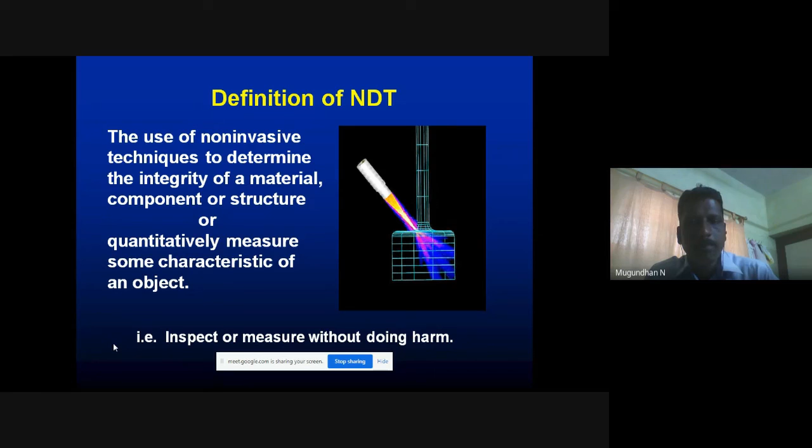Can anybody tell me what you're going to do in visual testing? Anyone? Yes, anybody else? Yes, visual, what are you going to do in visual?

In visual testing, sir, we can find out pinhole, undercut, reinforcement, and thickness of the weld, and see if any buckling is there in the plate or not. That's all.

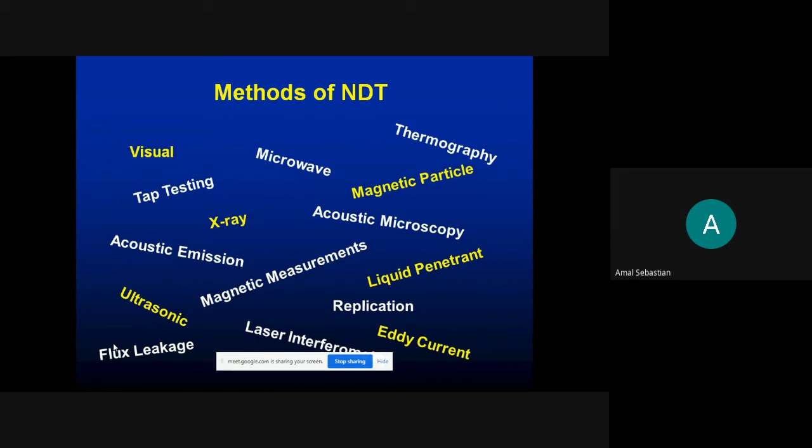Hello? Can anybody tell me where you can use this liquid penetrant testing? Liquid penetrant can be used only to identify the surface defects, which is present on the surface only, you can identify by this method.

When we come to the second one, magnetic particle testing, can anybody tell about this one? Yes, anybody else? Magnetic particle testing. Sir, it is used for detecting surface and shallow subsurface discontinuities, similar to the liquid penetrant testing.

We are using the magnetic particle testing. As the name indicates, magnetic particle, this can be applied only in ferromagnetic material. By using the magnetic force of attraction, we are using this particular method.

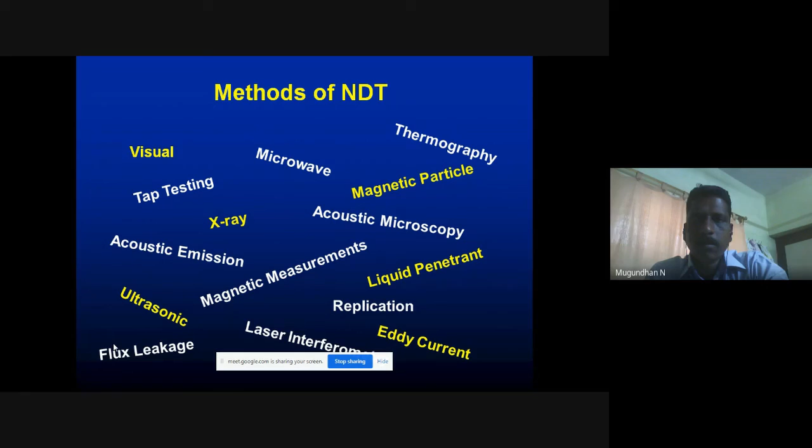I'm explaining the basic principles of each method. Is there any doubt? Can anybody tell me? Shall I move on to the next one? In this case, you can see what are some uses of NDE methods.

For what purpose are we using these NDE methods? NDE is nothing but non-destructive examination. First, flaw detection and evaluation - to identify defects and assess the size of that defect. Leak detection applies when we are doing pressure testing. Location refers to where a particular defect lies inside the weldment. Dimensional measurements mean the size.

Structure and microstructure characterization - can anybody tell me what this means? Structure and microstructure means you can see through the microscope the crystalline structure and the metallurgical characteristics.

Estimation of mechanical and physical properties - this is what I discussed in my previous session. We study mechanical and physical properties like tensile strength, ultimate strength, breaking strength, and toughness. These are all included in the estimation of mechanical and physical properties.

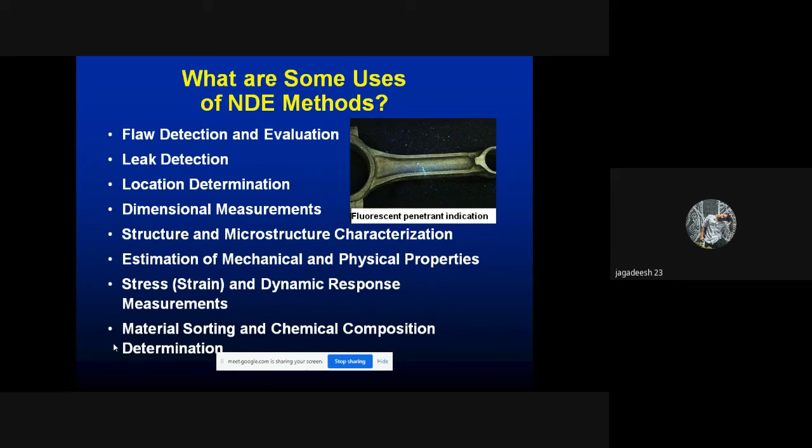Always father and son have some tug of war. If you are not doing something, or if your father is instructing you to do something and you are not doing it, what is his immediate reaction? He will get angry. Immediately he will call and scold us, right? Am I right or wrong? He will give a lecture as he likes.

Because of that, some sort of stress and strain happens to us, and the similar thing happens to the material also. Even when we ride a bike as youngsters, when we ride at higher speed, the mechanical components get some strain due to continuous stress. If you see that connecting rod, can you see that small crack in it? That happens due to excessive load and the corresponding strain occurs on that connecting rod.

Material sorting and chemical composition means we are classifying the material, say for example IS 2062. This is actually a mild steel material with 3 grades - grade A, B, C. Grade A can be utilized for heavy structural components fabrication. Grade B can be exclusively used for manufacturing pressure vessels. This material is categorized according to chemical composition - grade A can withstand high compressive strength, whereas the tensile strength is much higher in grade B material.

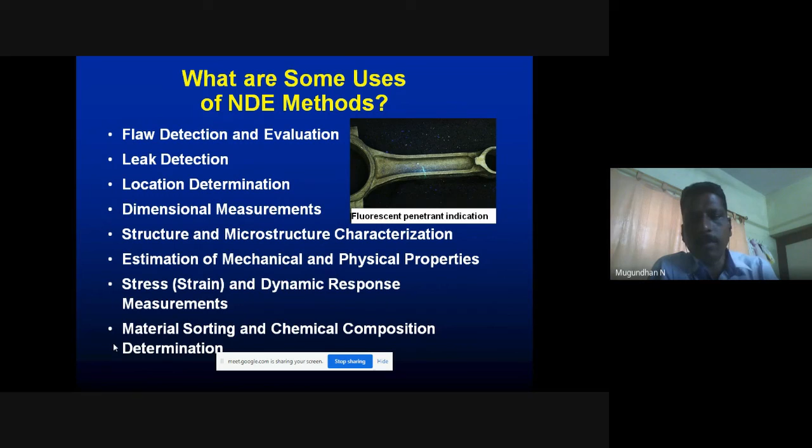You can use these NDE methods to assist in product development. What do you mean by assisting in product development? Can anyone tell me?

To give a precise product as per the customer's need, when a company is going to launch a new product, they will try to do all kinds of research and design in the design department. They will use the trial and error method, manufacturing one component and subjecting it to different types of tests, and finally they will conclude which is the material needed for the actual product. That is called assisting in product development.

To screen or sort incoming material means the material which is coming to the factory from the material stockyard, so that material can be classified. Also, to monitor, improve, or control the manufacturing process.

Can anyone else tell me about this factor? Yes. Anyone else? To monitor, improve.

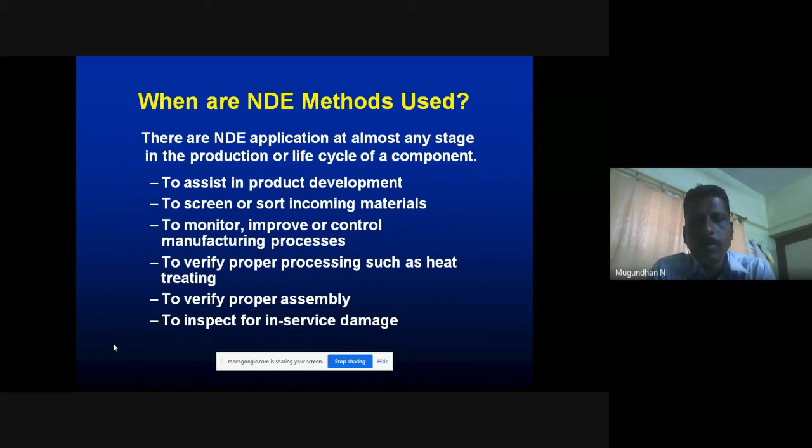In-service damage means once a product is sent to the customers and it will be in operation for some stipulated time. For example, after one year, we may be doing that AMC. In that case, the concerned quality team will be assessing that product, how far it works, and what is the performance of that particular product. Is there any discrepancies that has to be sorted out? Those things will be done under inspect for in-service damage.

This I have already told you: visual, liquid penetrant, magnetic, ultrasonic, eddy current, and X-ray.

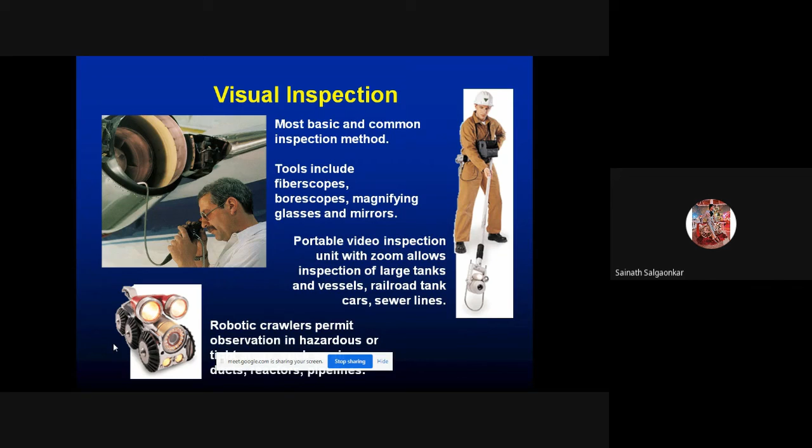Sir, helmet, safety shoes. Mirror, torch - you said safety shoes, right? Yes sir. And boiler helmet, that will be monitored by the safety personnel, they will be doing that visual inspection from the safety side. But as a quality inspector, what you said is correct - mirror, torch, magnifying glass, then even steel rule also, measuring tape, right? These are all basic equipments that should be used, right?

You can see that fiberscope, borescope, it depends on the inspection to be done on the precision equipments. And can you see that some trolley like that? Do you know where that will be used? Exclusively where the concerned inspector cannot do the visual inspection directly, or when the necessity arises, they have to do the inspection on remote parts. In that case they will be using robotic crawlers. For example, when we are working in a nuclear power plant, you cannot directly go and do that inspection, so you need some sort of remote visual inspection devices. These are all the devices used in that particular sector.

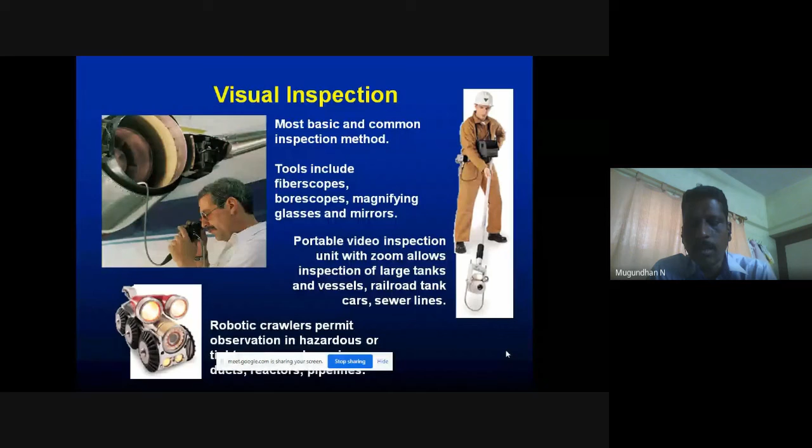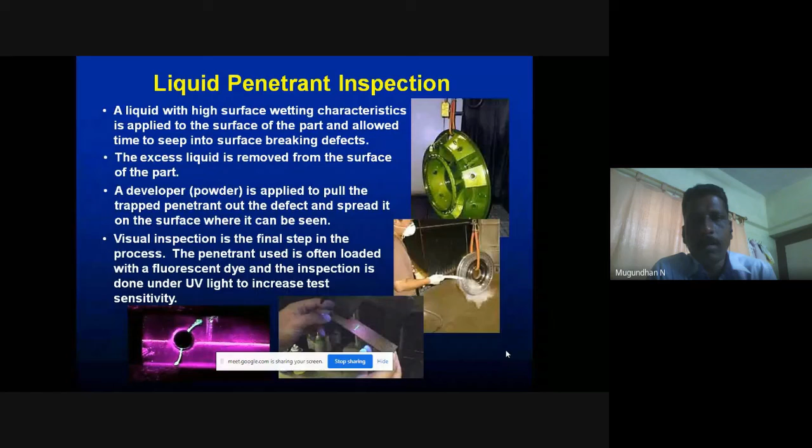After that, the excess liquid is removed and the developer is applied. After applying the developer, we have to give some time for the penetrant to come out. That time is called the development time.

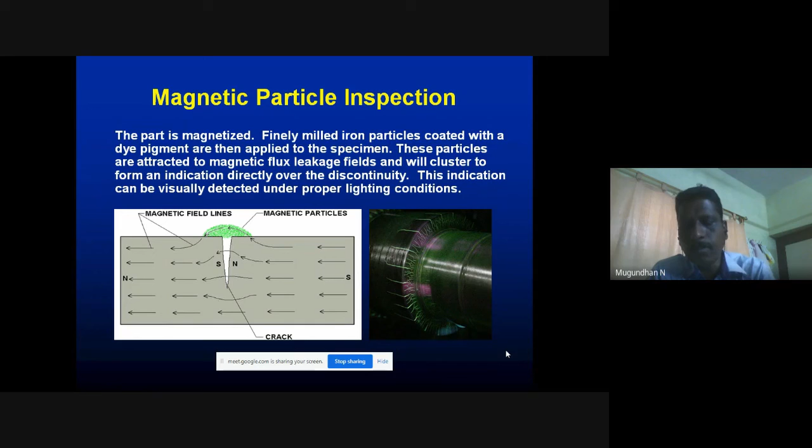In magnetic particle testing, we are using two methods: one is the visible method and another is the fluorescent method. The fluorescent method is mainly used for identifying defects which cannot be seen visually, exclusively for critical components. You might have seen aircraft blades - those are all precision components. So if we want to identify any crack on turbine blades, we can use the magnetic particle fluorescent method so that we can easily identify the defects.

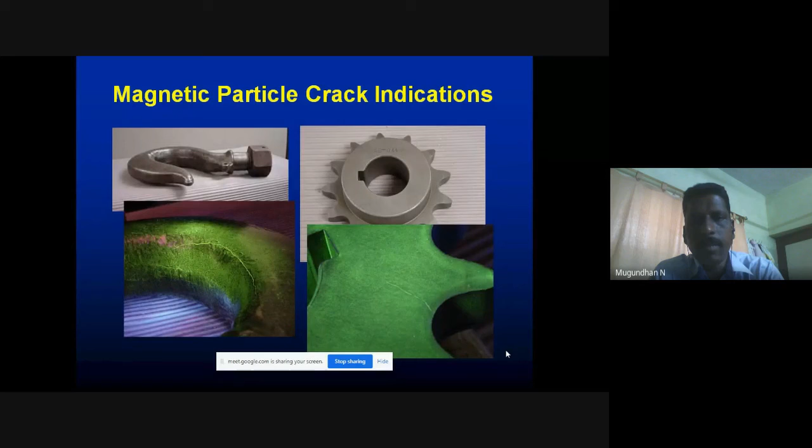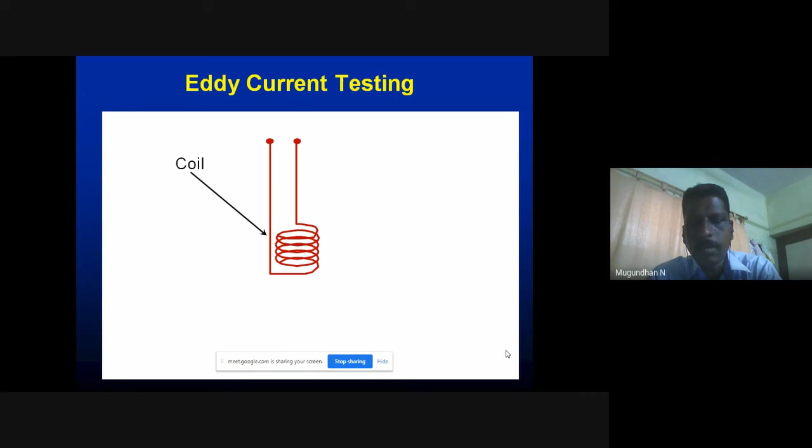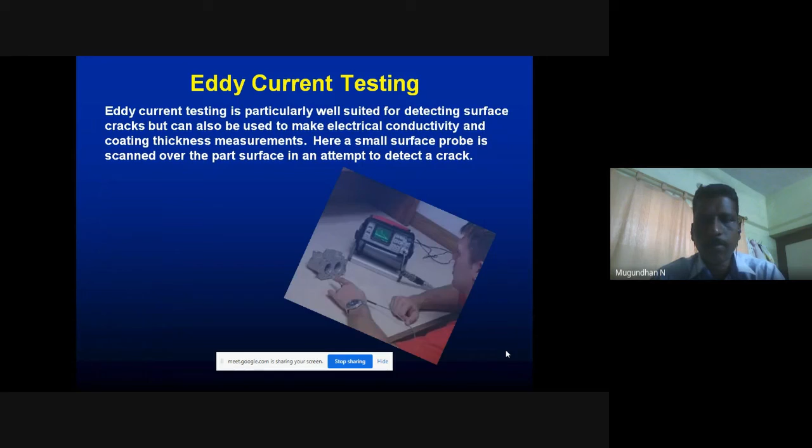Just let me show you how it is used. By using that coil, they are producing the magnetic field, and from that magnetic field we can identify the defects. Yes, this is how they will be performing the eddy current testing.

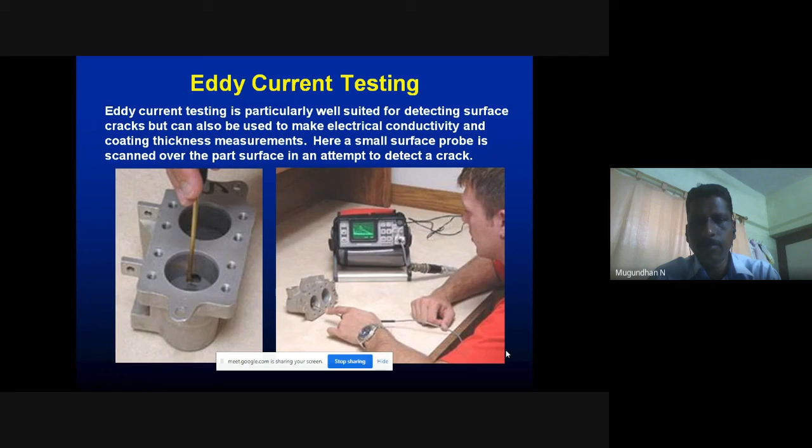Once the sound signal is fed to a job or workpiece, it travels inside the workpiece, and wherever there is a change in the medium - up to here the material is in solid state, but when it comes to the crack, this will act as an air or gas medium - whenever there is a change in the medium the sound travels through, that particular sound wave gets reflected. So this distance will be calculated as the distance of the defect.

But the only thing is, by using this ultrasonic inspection testing, we are able to find the location of the defect, but it's very difficult to find the type of defect. Whereas in the case of radiographic testing, you can easily identify the type of defect, but it's difficult to locate the location of the defect.

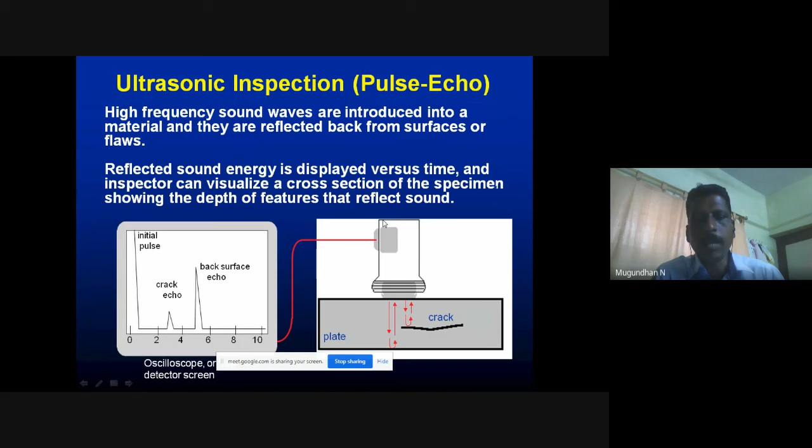The second echo, which gets reflected at the crack, is called the crack echo. The echo which gets reflected at the bottom of the job is called the back surface echo. So by this, they are able to identify the defects.

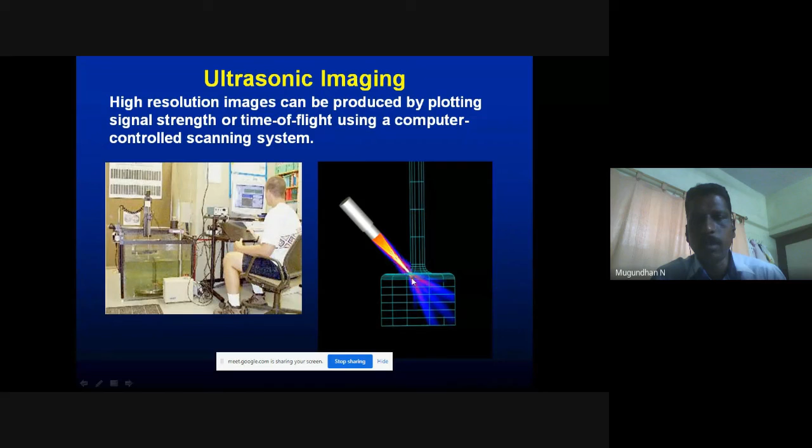Now you can see the image of it, how the sound waves travel inside the job - it will be like this. Can you see this one? They're getting the image of that particular component by using the ultrasonic testing method.

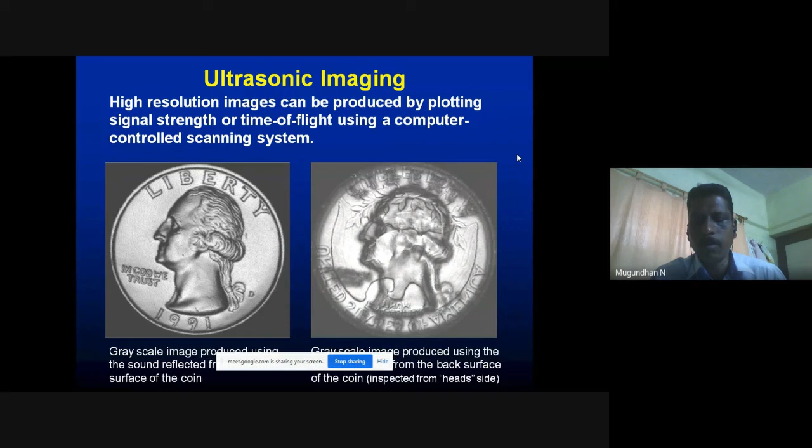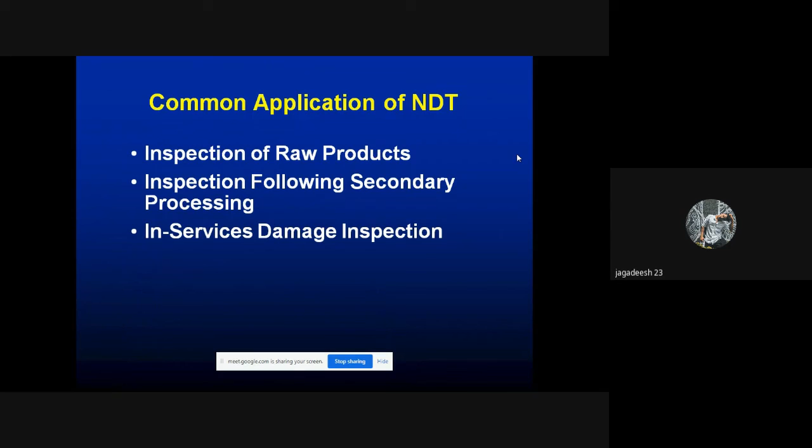Sand. Okay, so what are you going to do with this sand - sheet metal, sand? A very simple thing is, you're procuring two plates for doing welding. I'll take this material itself as an example.

First of all, we must know if there is any defect on the raw material, so that we are 100% sure we will be doing perfect welding. But how do we know that particular raw material is in perfect condition or not? So in that case, to assess the strength of the material, we go for raw material inspection, which can be done using the ultrasonic testing method, as I said in the previous slide - the same thing can be done on the plate, so it can be easily assessed and checked without disturbing the material. You can easily say whether the material is in sound condition or a defect condition.

Even in the case of gear manufacturing companies, they'll be getting that gear blank, which can be thoroughly assessed using ultrasonic testing before going for any further processing of that material. So that is the inspection of raw products. What is the inspection following secondary processing?

Now the raw material inspection is produced, and till the final product, in between that is the inspection to be carried out, is called as the secondary processing. In services damages, that is after the product is in service, if they are calling us for some AMC, in that case we may be doing in-service damage inspection. Now just have a look on inspection following secondary processing.

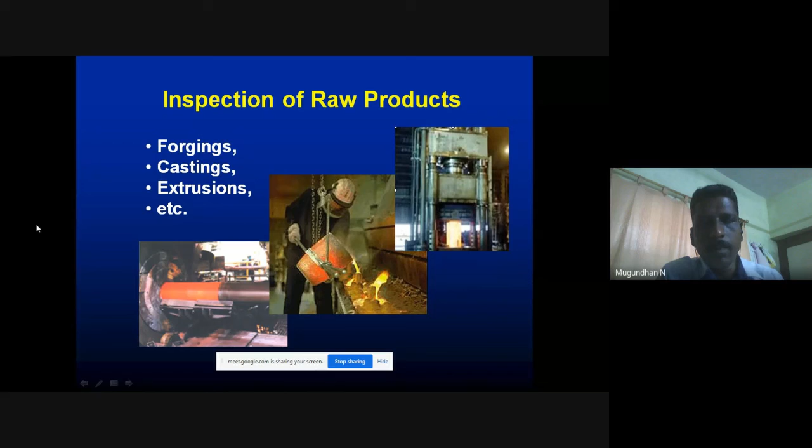What is meant by extrusions? During Vinayaka Chaturthi, we may be seeing that person putting all the clay inside the die-shaped component and getting the Vinayagar out of it, right? This is one sort of extrusions.

So in each and every stage, we can do NDT inspections.

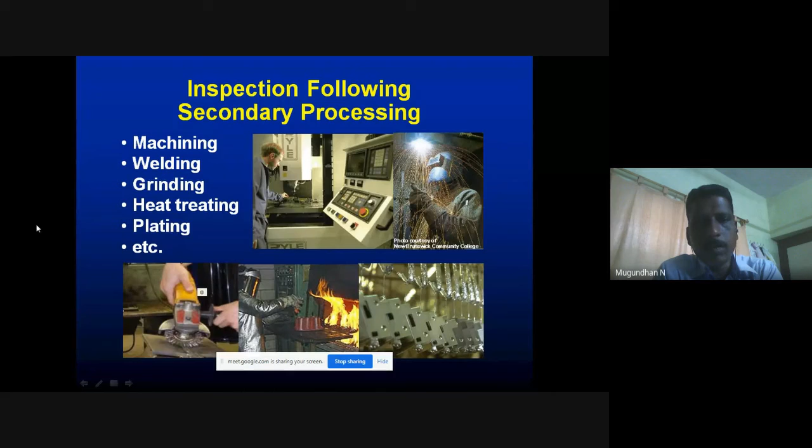Corrosion is an extra layer which is formed on the material, it's a process of oxidation - an oxidation formation on the material, right? Erosion is nothing but the wear which occurs on the material. And heat damage.

Can you say what is meant by heat damage? I think you might have experienced this one. If you come and stand outside around 12 noon, what will happen? Immediately we will be getting exhausted within a few minutes - that is called heat damage. The same thing, also material getting heat above its limit, so it gets corroded, something like that.

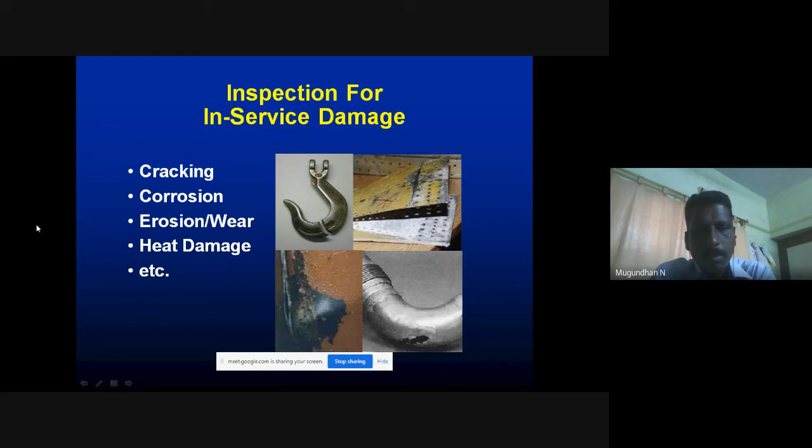That is when we are doing welding, right? So when we are doing the welding, to some extent the parent material gets damaged on that particular portion - that portion is called the heat affected zone. So when a welding inspector is doing inspection, he should not only concentrate on the weldment, he should also look at either side of the weldment, that heat affected zone, because due to this welding some portion may get damaged on the parent metal also. That is called heat damage, because we usually come across heat affected zone cracks also.

Now you can see where all this NDT can be used. It's having a wide scope in each and every sector. In power plants, what they are doing is eddy current testing - they are doing eddy current testing in the heat exchangers, the tubular heat exchangers. Can you see that one? Tubular as well as you can do it in the plate heat exchanger also.

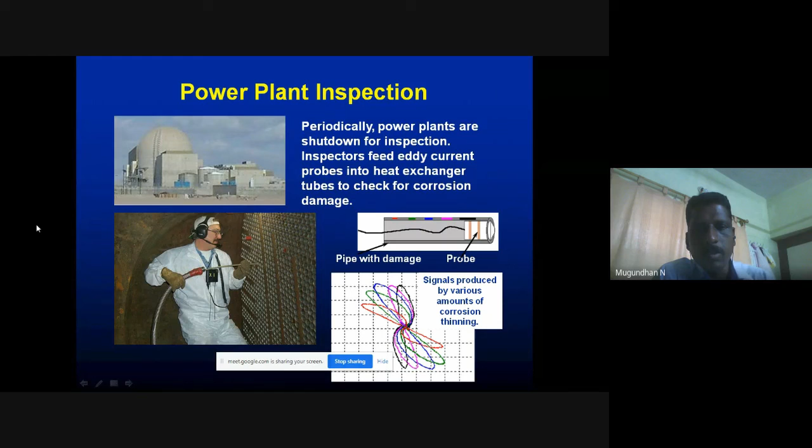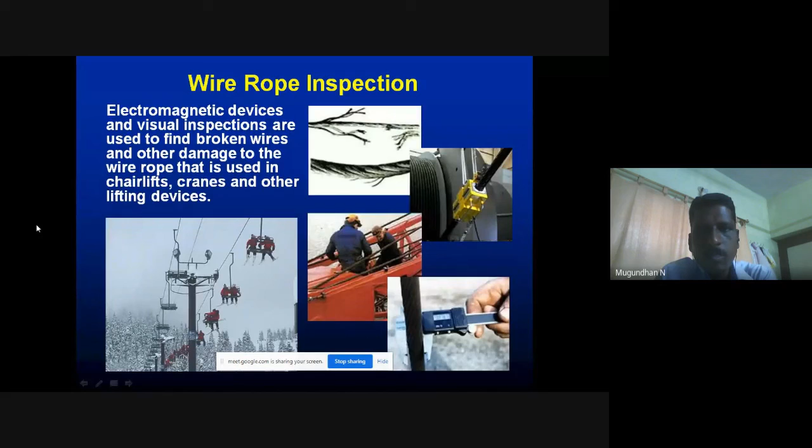Wire rope. For your information, apart from the NDT methods we have seen now, there is a separate method called wire rope NDT, exclusively for wire rope inspection. So if any person wants to do wire rope inspection, they have to use separate methods. What we have seen so far is conventional. This comes under special categories. In wire rope inspection, they are using electromagnetic devices.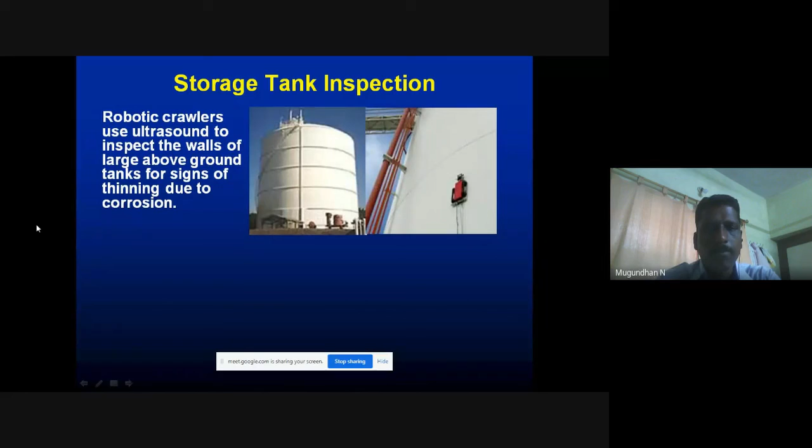Can you see this one? They are telling about signs of thinning. What do you mean by thinning? Can you tell me? Yes, anyone else, what do you mean by thinning? That is the reducing of material thickness, which is called thinning. Due to corrosion, the material gets eaten up and may fall, and due to this, the material thickness gets reduced.

Can you see here? These are the special inspection equipments used for underground storage tanks.

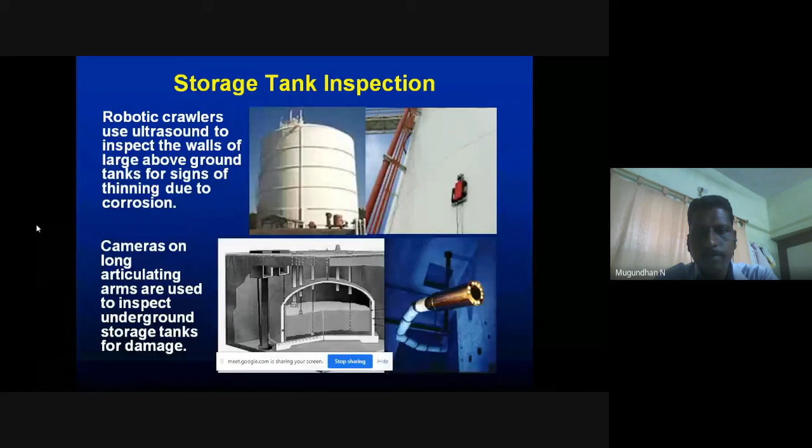Aircraft, yes. See, they are doing UT inspection, and there is another term called UTG, ultrasonic thickness gauge. That particular technician is doing UTG thickness checking on the aircraft fuselage. They used to go for frequent checking of fatigue cracks.

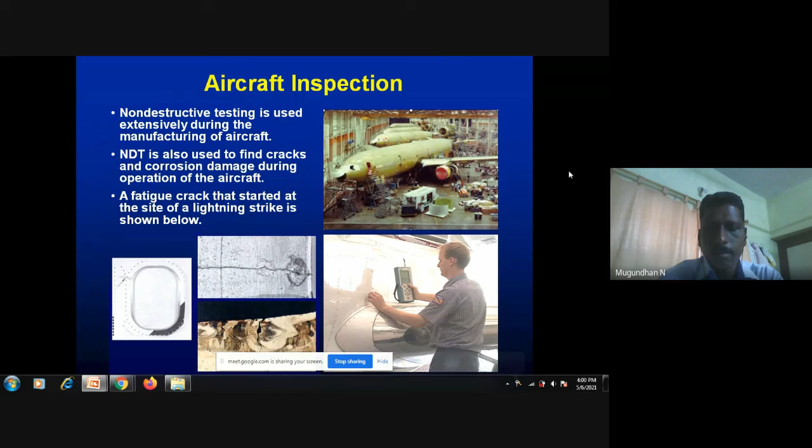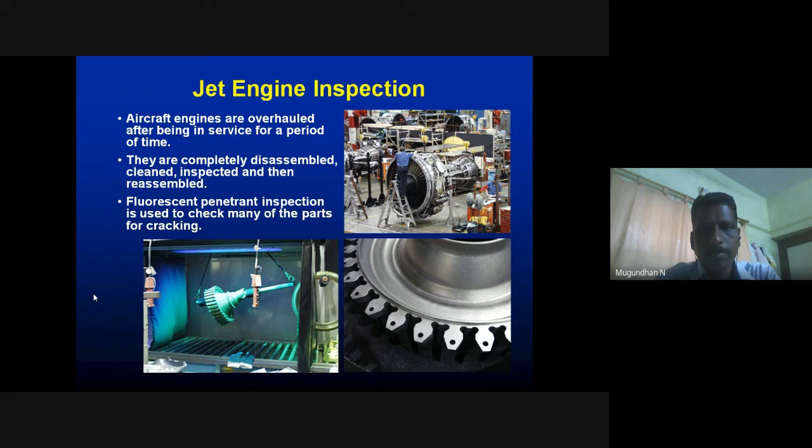Jet engine, yes. Here, can you see this one? A turbine. This entire mechanical component will be thoroughly subjected to NDT inspections. As I said earlier, to check precise defects which cannot be seen easily, that can be inspected by using fluorescent penetrant inspection.

Can you see this one? They are keeping the film inside the pressure vessel, and here you can see technicians working. Can you tell me what is the device name? It's actually a radiation detection device. It's a risky one. Here you can see they are using the iridium-192 source, and by using iridium-192 they are passing radiation on that particular weldment. So to ensure safety, they have to check how far these radiations spread through that component. Accordingly they have to do barricading, so that we are cautioning outsiders so they should not come inside while the RT activity is going on.

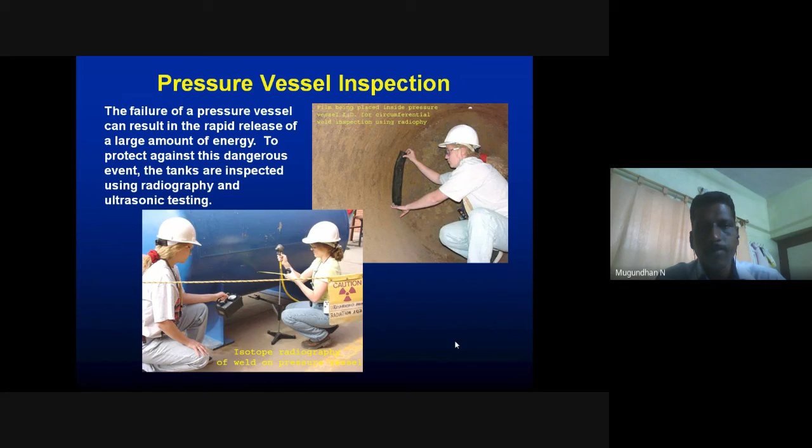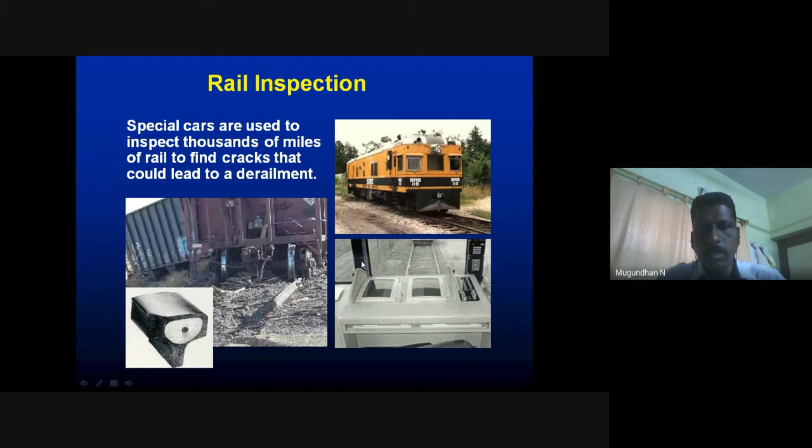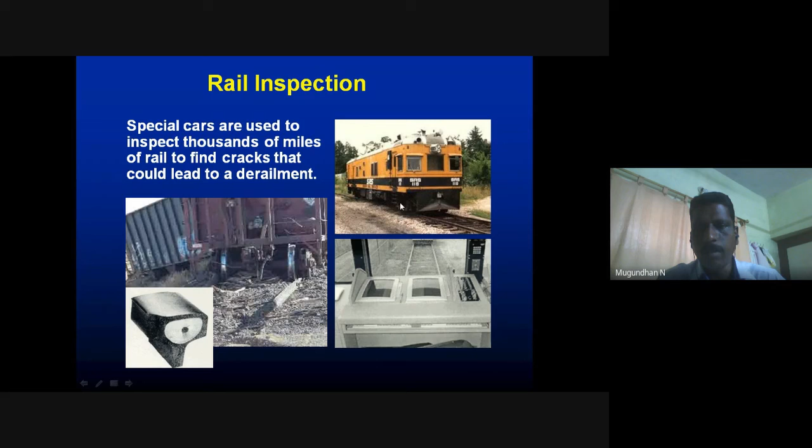Rail inspections, yes. When you get a chance to see, in locomotives or wagons also, you can see it will be written UTOK on the side of the wheels. That is, it has to be frequently checked for any defects. So UT is widely used to identify defects, especially on the shafts.

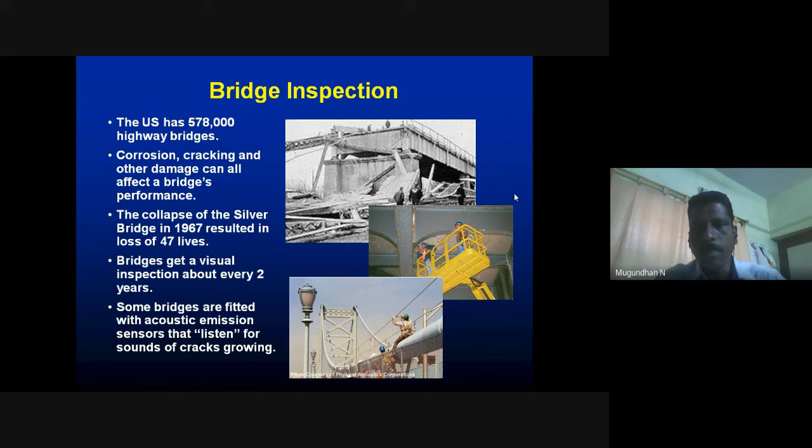Bridge, there is a separate entity called civil entity, especially used in civil constructions. They perform tests like rebounding test, hammer test. For that purpose, they will be doing bridge inspections.

Any questions? In this presentation I didn't show NDT related to the marine field, but can anyone tell me where all you can use NDT in marine? Yes, in shipbuilding. Okay, in shipbuilding, definitely fabrication activity is there, so wherever welding comes, NDT also plays a major role. When doing welding on the external side, you may use either LPT or MPT, but to identify defects on the inner part of the weld, we may have to go for radiographic testing or ultrasonic testing. Some customers may prefer ultrasonic testing, in that case you can go for it; if not, RT is much better. In some cases, when they are doing RT inspection, some customers may also ask for ultrasonic testing to check the location of the defect.

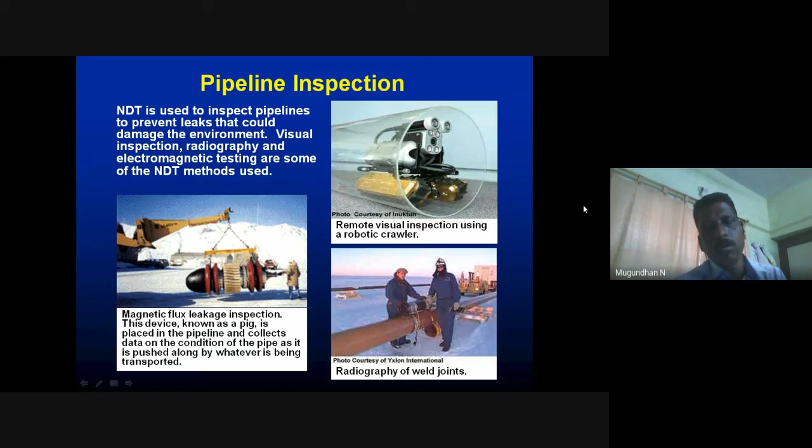pandemic, we have to go for Zoom meetings or online classes like that. So when we get a chance to meet in person, we can share more information, or I can also share my experiences along with you. Okay, right?

Okay sir, thank you Mugundhan sir. Okay sir, Sivabalan sir, thanks for your organizing. Okay sir, one more information to the students.

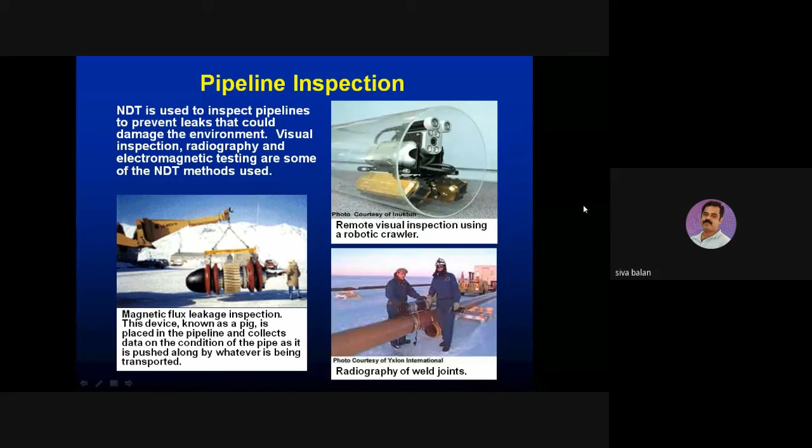In 2019, we conducted a 1 week workshop on NDT in shipbuilding, application of NDT in shipbuilding, with Chennai Engineers Academy. We gave information to the students, and I think Mugundhan sir was with us for the full week. Our passed out finalists, the last batch, the 10th batch students, did the NDT course. That time Mugundhan sir was with us for 1 week with hands-on practice, etc.

So before you leave the campus, if possible, we will arrange NDT level 1 and also level 2, if students are interested. We can organize that workshop again, at least level 1 or level 2, in the basic welding course. So that also we are planning.

Moreover, your interest is required. So if students are interested, we can organize these kind of workshops or certification courses that will be validated, valuable certificate courses only, so that we can conduct them. Okay, so thank you very much sir, for your... thank you sir.

Thanks for a wonderful meeting, and so that I can share my experiences also, right? First of all, I have to thank the management, the HOD, and Professor Sivabalan for organizing a very good guest lecture, right? I hope I have given some information on NDT through this online session, right? I hope everybody might have enjoyed these sessions, right?